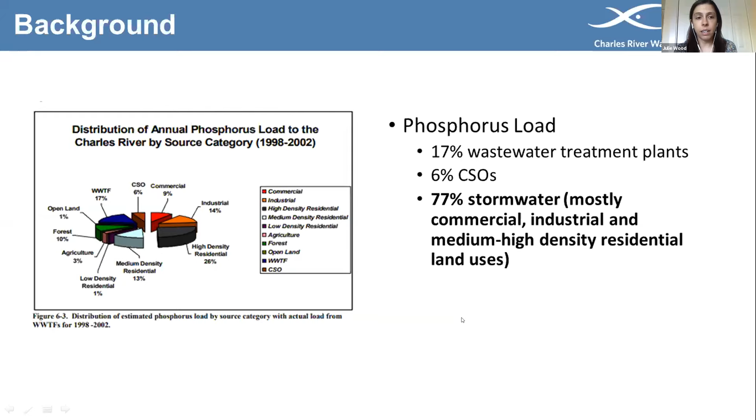TMDLs are essentially pollution budgets - they tell you how much pollution you have compared to how much you should have, and lay out a plan for how to get there. The Charles River nutrient TMDLs identified phosphorus as the nutrient of concern and stormwater as the primary source - the primary way phosphorus gets into the Charles River. The TMDL is now being implemented through the Massachusetts MS4 permit.

As many of you know, in 2016 a new permit was issued. It was postponed for a year but went into effect in 2018. In 2019, your year one reports were due and you got them in. Now in 2020, the year two reports will be due shortly. There is also an amended permit out for public comment, but again, that's not our focus for today.

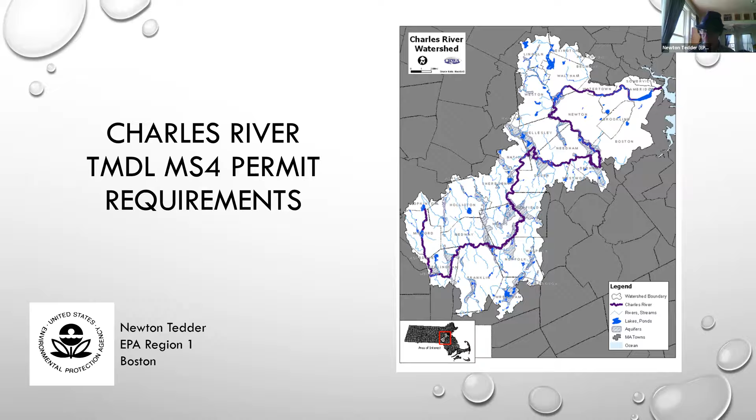I'm going to go through the TMDL requirements and the MS4 permit for Massachusetts. As Julie mentioned, all these requirements are contained in Appendix F of the 2016 Massachusetts MS4 permit, currently in effect, affecting all communities in the Charles River watershed. I'll go briefly through a TMDL overview - background on how those TMDLs got into the MS4 permit - then through phase one of the phosphorus control plan requirements in Appendix F, since that's our first phase, affecting the next 5+ years of implementation, and where everybody should be focused right now.

Then I'm going to go through phosphorus reduction credits - the things everybody can be doing and should be aware of that are available for communities to take advantage of, to meet the phosphorus reduction requirements contained in the MS4 permit.

Okay, so we've got two phosphorus TMDLs, as Julie mentioned. There's the Upper Middle Charles TMDL and the Lower Charles TMDL. The Lower Charles was completed in 2007, and the Upper Middle was completed in 2011.

It is a really urbanized watershed for the most part. We have 35 cities and towns. It's 308 square miles, and it covers about 900,000 people in population, a little bit more now, so that number is a little bit old. But this is a pretty urban watershed.

As Julie mentioned, the main source of phosphorus impacting the Charles River throughout the entire basin is stormwater. Over 70% of the problem is due to stormwater. Therefore, the TMDL is really focused on that particular source of phosphorus, where those sources were coming from, what land use areas were contributing the most, and what those reductions needed to be to meet our TMDL goals.

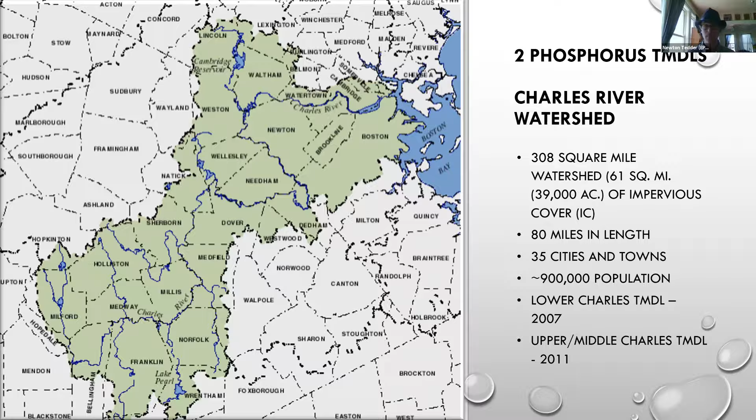The Lower Charles was the first of the TMDLs to go in 2007. Each TMDL needs to include what's known as a waste load allocation. Any permitted source, any National Pollutant Discharge Elimination System or NPDES permitted source, has to have a waste load allocation in any EPA approved TMDL. That waste load allocation is what that source needs to reduce their discharge of that particular pollutant down to in order to meet water quality goals.

So for instance, the Stony Brook watershed has an existing load of 5,123 kilograms of phosphorus per year discharged into Stony Brook. Their waste load allocation was 1,950 kilograms per year. So that means you have to get from their existing load down to their waste load allocation in order to meet their water quality targets.

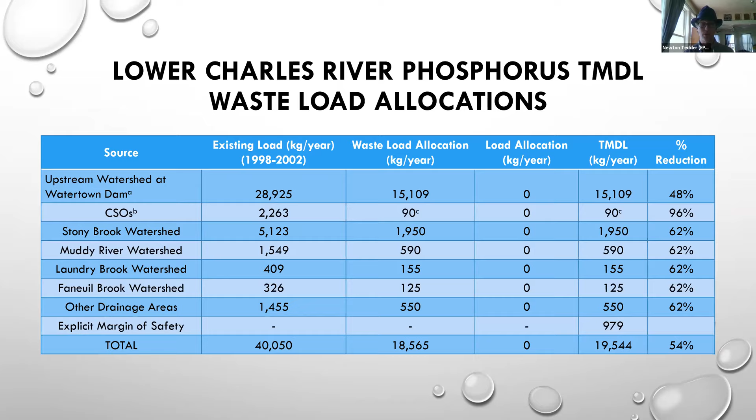And once we have a TMDL with a waste load allocation for particular NPDES permitted sources, any permit issued to those sources needs to contain that waste load allocation and measures that are consistent with the TMDL and that waste load allocation to ensure that those discharges meet water quality.

Both the Upper and Middle Charles TMDL and the Lower Charles TMDL went through the amount in kilograms per year of total phosphorus that needed to be removed from multiple different sources throughout the watersheds. They also provided a waste allocation in the form of a percent reduction from that particular source. Also, the TMDLs broke down even further the waste allocation into particular land use groups, assigning different reduction percentages to those land use groups in order to meet water quality goals.

The Lower Charles TMDL was a much tighter area. It is highly urbanized, containing mostly Boston, Cambridge, a bit of Somerville, some of Watertown, some of Newton, some of Waltham. So that TMDL is a very hyper-urban environment, and they just assigned the same waste load allocation to each land use. So if each land use contributing phosphorus to the Charles River was to reduce their phosphorus loadings 62% per year, the Lower Charles would meet the goal.

The Upper and Middle Charles broke it down a little further than the Lower Charles TMDL and assigned different reduction percentages to different land use groups. So you can see here that commercial, industrial, high density residential, medium density residential, and highways all got the same 65% reduction. As Julie mentioned, commercial, industrial, and high density residential are our main sources of phosphorus throughout the watershed, and it is therefore why they get the highest percentage of reduction required.

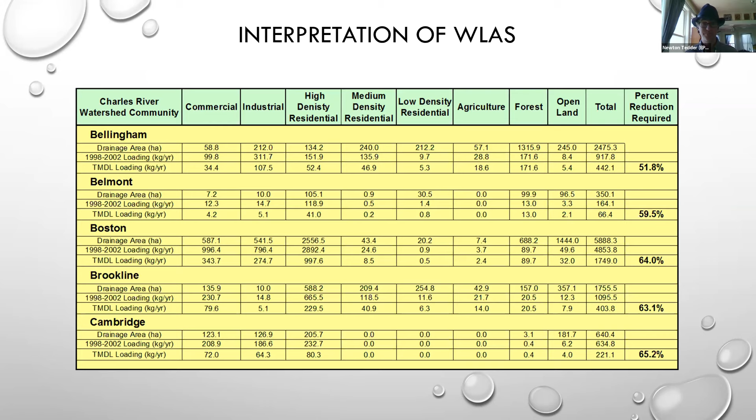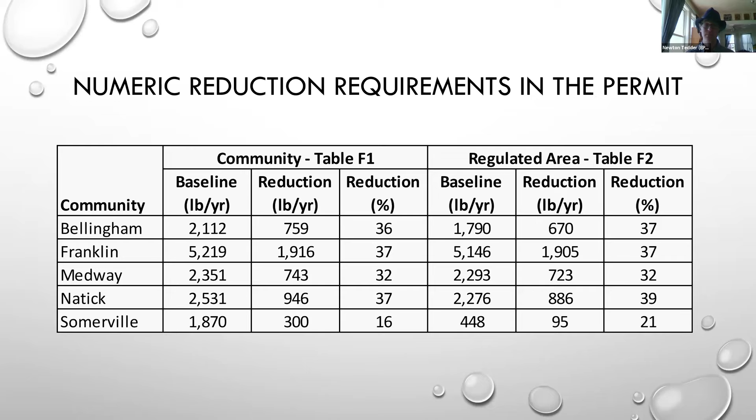The permit contains a long implementation schedule for full implementation of the Appendix F requirements for the Charles River TMDLs. The permit anticipates complete adherence to the waste allocation within a 20-year timeframe, but offers a significant ramp-up time and significant work at the end. This was done very deliberately to allow for a lot of planning upfront and breaking up the work into different phases, phase 1, 2, and 3, corresponding to 5-year increment periods for implementation. Our hope here was to have a really deliberate process by each community to take this seriously, give them enough time to put all of the correct mechanisms in place to allow them to do it successfully, and have a successful program over the next 20 years so we can eventually meet water quality throughout the Charles River watershed.

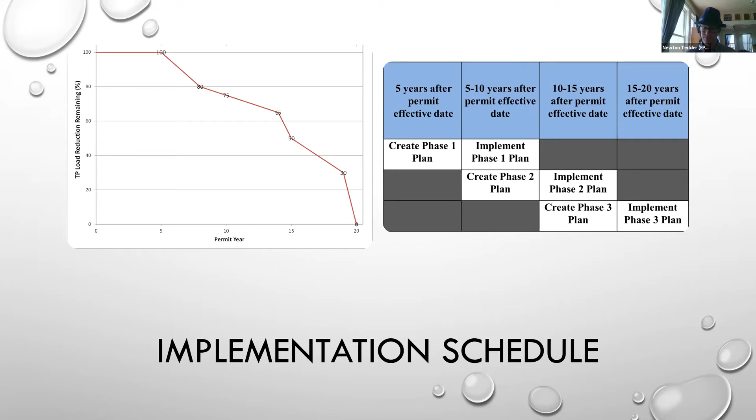Today, we're just going to be focused on the first 5 years of implementation. So this is phase 1. The phase 1 PCP, or phosphorus control plan, needs to be completed over the first 5 years of the permit term and then implemented over the next 5 years. So while the permit term only lasts 5 years for an MS4 permit, the schedule in this MS4 permit goes out beyond the term of the permit and remains enforceable until a new permit is in effect.

Phase 1 includes a lot of different components. This is much bigger than the phase 2 and 3 requirements, just because, again, we're talking about a very deliberate process, hopefully laid out in specific pieces over the course of 5 years to end up with a comprehensive phosphorus control plan after 5 years that can be implemented by each municipality over the next 5 years of implementation. I'll be going through each one of these pieces today, touching a little bit on what we are expecting out of each one of these pieces, and I'll go through them as far as when they are due.

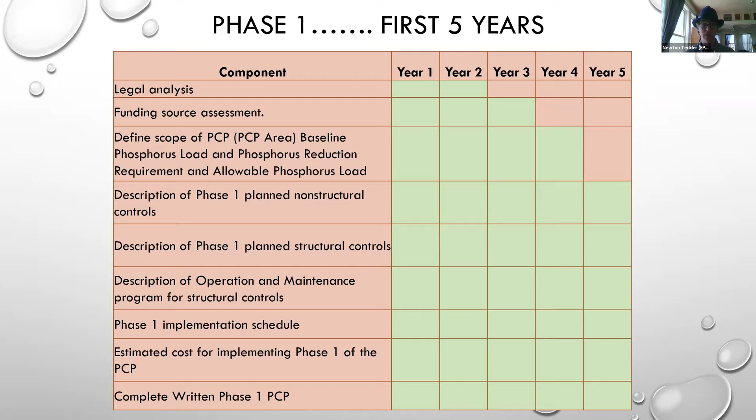The first one is their legal analysis, and hopefully everybody that is covered under this permit has already completed this. If not, you've got 1 month left to go. Annual reports are due for year 2, or they are due September 30th of this year, and they cover the reporting period that ends June 30th. So year 2 of the permit term ends June 30th, and the legal analysis for all Charles River communities for their phosphorus control plan needs to be done by year 2, and they'll be reporting on their legal analysis in this year's annual report.

What is a legal analysis? This is really a pretty open-ended piece, so this shouldn't have been a very big lift by year 2. It is really for the municipalities or permit holders to look inside and see if they have the correct ordinances in place. Do you need additional ordinances? Do you think you will need additional ordinances to implement your phosphorus control plan? Do you have easements that are necessary for operation and maintenance authority, for instance? Do you have the correct legal authority to help with anticipated funding mechanisms? Or are there any other legal authorities that you think you may need that will help you deal with the phosphorus loadings that are coming from private property owners that are entering your system? And if so, the analysis requires you to identify those and begin to implement those to get those authorities in place as soon as possible.

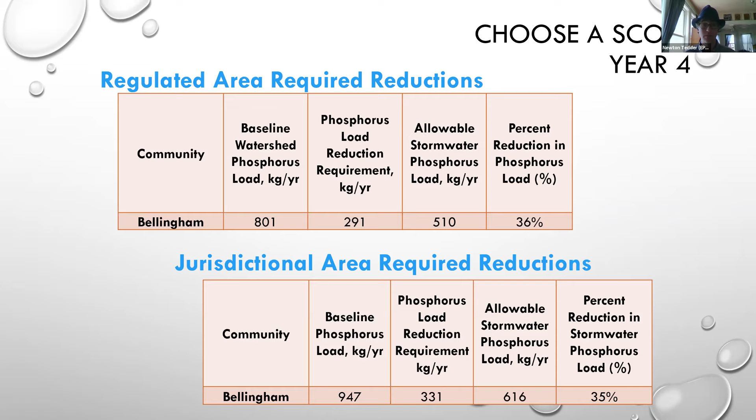So what does regulated area mean versus jurisdictional area? For instance, if we look at Bellingham, our regulated area map is shaded in red, and the unregulated area consists of those donut holes within the shaded area. Under MS4 regulations, only discharges originating from or through that regulated shaded area require an NPDES permit.

Discharges outside of what is known as urbanized area, according to the US Census, do not need a permit and are not subject to MS4 permit requirements. However, the MS4 permit in Appendix F allows the community to make a choice for themselves on where they want to implement their phosphorus control plan, and that choice comes with different loading rates and different requirements.

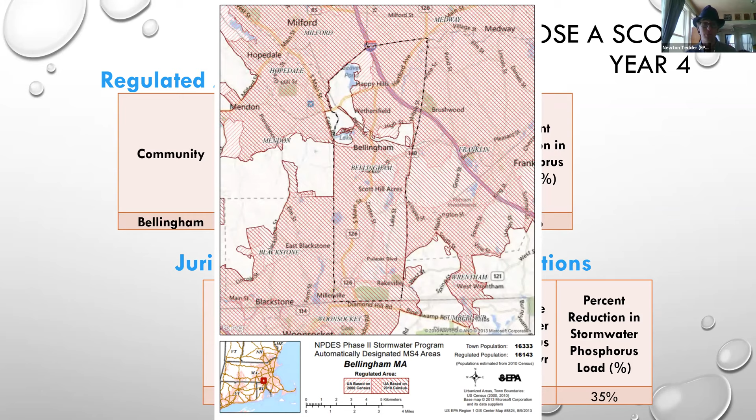If a community chooses to work just within their regulated area, controlling only the phosphorus coming from their regulated or urbanized area, that generally has a lower total phosphorus reduction requirement placed on the municipality or permit holder. However, only structural and non-structural controls done inside that regulated area can be counted towards that load reduction.

There needs to be additional accounting on the part of the permit holder to carve out where they're street sweeping, where they're catch basin cleaning, where the structural controls are being done, in order to only count those controls done in the regulated area towards their reduction targets.

The regulated area scope also allows permittees to submit updated land use information in year 5 of the permit term, as well as updated catchment information to refine the TP reduction targets in the next permit term. This means you can submit land use and catchment information that could carve out additional sources of total phosphorus to deal with in another way. Therefore, your total reduction requirement may go down if you submit refined catchment information.

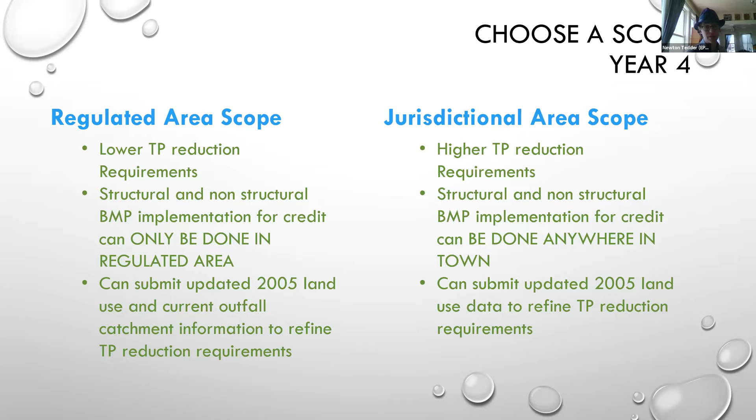Your final written PCP is due in year 5. And this includes all of the other pieces I showed you back in the phosphorus control plan schedule. So this is a description of all the structural and non-structural controls you're going to be using to meet the phosphorus reductions required in phase 1, based on the jurisdiction or regulated area choice that you've just made.

It includes operation and maintenance plans for structural BMPs that you are planning to implement for phase 1. It includes a structural implementation schedule. So where are you going to put all of your structural BMPs for phase 1 to meet your reduction targets? It also includes estimated costs. So you need to cost out all of the structural BMPs and non-structural BMPs you'll be using to meet your phosphorus reduction targets and provide an estimated cost in year 5.

And this is where you would be submitting any land use change or catchment delineations with your phosphorus control plan for use in future permit requirements by EPA.

Your phase 1 milestones that you're going to be looking at. So these are the 2 milestones within phase 1, and this is how you will begin to look at how much phosphorus you need to reduce in order to start to identify what non-structural and structural control practices you'll need to be implementing by year 10 in order to meet these permit milestones.

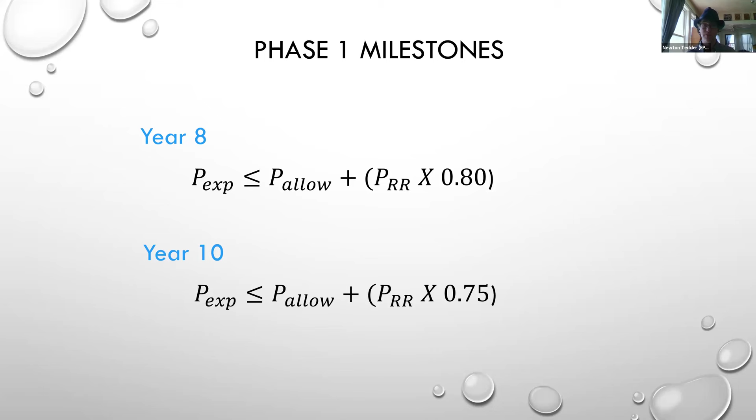Let's go through an example. So Bellingham has a baseline phosphorus load of 947 kilograms per year, a phosphorus load reduction requirement of 331 kilograms per year, allowable stormwater load of 616, which is a overall percentage load of 35%. That's based on all the land uses throughout Bellingham, using the phosphorus reduction requirements in the TMDLs.

So for year 8, the export must be below 880 kilograms per year. That is taking the allowable phosphorus load and adding in the reduction requirement times 0.8, so a 20% reduction. That's a reduction target of 67 kilograms per year that Bellingham needs to reduce by year 8 after the permit went into effect. Year 10 is a 83 kilogram reduction, which equates to about a 25% reduction in 25% target of the pollution reduction total. So 83 kilograms per year of total phosphorus reduction by year 10.

Those numbers are necessary for each community to begin looking at all of the things I mentioned before. So this is supposed to be a comprehensive plan that you look at and figure out, okay, I've got 67 kilograms per year by year 8, 83 by year 10. What are the stormwater controls that are going to be needed to meet that? What are the costs of those are going to be within a range? Do I have the funding mechanisms in place? All of this sort of fits together in one big comprehensive plan to meet these two milestones.

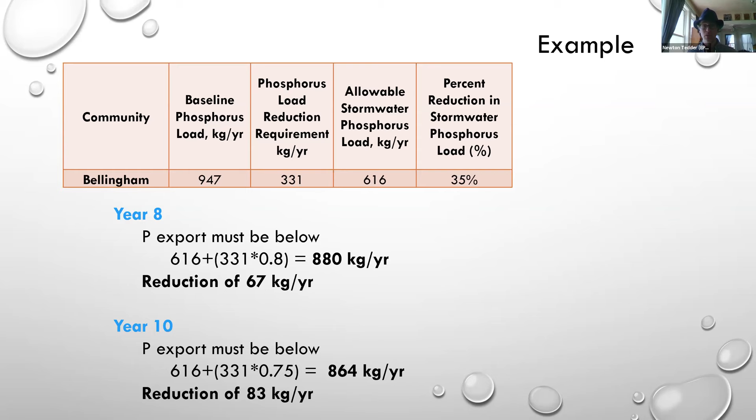Compliance with this is demonstrated not through monitoring of BMPs or monitoring structural controls or non-structural controls, but with specific reductions and increases that are laid out within the permit itself and Appendix F appendices. So this becomes a math exercise, an accounting exercise where you are certifying that you're doing certain BMPs.

Those BMPs are automatically given credit within the permit scheme. So when you're doing them, you are documenting that you're doing them and plugging them into different tools we have, or this large math equation saying these are the practices I'm doing, these are the land use changes I've had over the last year that would increase my total phosphorus load. For instance, new development that would increase your total phosphorus load.

And you're coming up with what your export is in mass per year, every year of the permit term and every year going forward after year 5. So this is a lot of accounting. There are pieces here that you need to keep track of.

However, we're trying to make this as easy as possible in that you're not actually having to go out and prove that every BMP is working the way that you say it is. We have a very consistent way of demonstrating compliance with the TMDL watershed wide. So this is not a community by community thing. Every community in the watershed needs to be using the reductions and increases laid out in Appendix F.

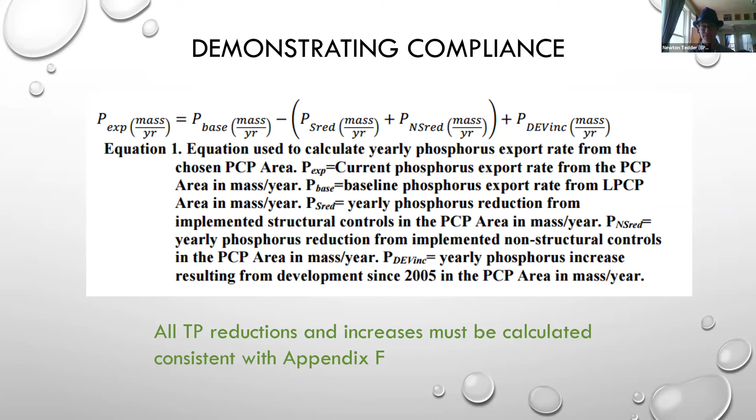So there's a lot of things in Appendix F that are actually available for credit. Structural BMPs available for credit are laid out here in this crosswalk. This crosswalk was developed by UNH Stormwater Center, but it's available on our website. It takes the Massachusetts Stormwater Manual and crosswalks that with the EPA pollutant curves.

It tells you what EPA pollutant curve you would be using to estimate the phosphorus reduction from all the different practices contained in the Massachusetts Stormwater Manual that developers or municipalities are used to using. This is basically just a difference in nomenclature. If you were to pick any stormwater manual from across New England, they would probably name things slightly differently.

So this crosswalk does a really good job of saying, when you have a water quality swale that you've designed in accordance with the Massachusetts Stormwater Manual, you're going to use the EPA grass swale curve to figure out what pollution reduction you get from installing that water quality swale.

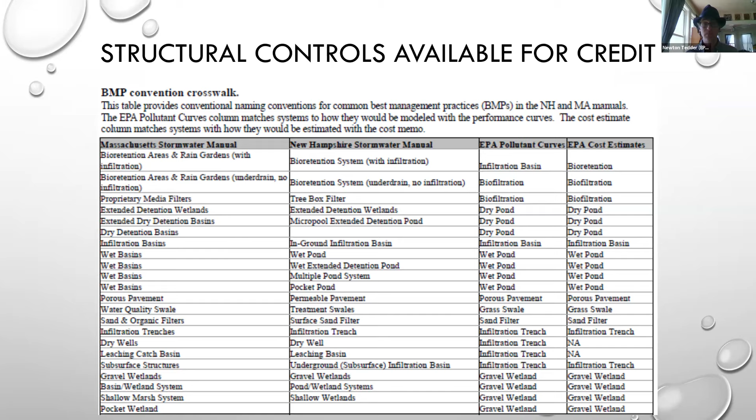So what does that mean? Your structural BMPs are going to be installed in order to meet your total phosphorus reduction requirements throughout the municipality over the next 20 years. Each one of those does work, removing phosphorus from stormwater before discharge.

And all of those stormwater controls act differently based on their sizing. So EPA in Appendix F has created multiple different, what are known as pollution reduction curves, for different pollutants and volume for different types of BMPs that were in the last slide. They're all based on the physical storage capacity of that BMP.

And what that means is it's the total design storage volume. You can think of it like volume, length times width times height. And storage volume is that plus you need to take into account porosity of the material that is storing the water for that structural control.

You take that designed volume of water that the BMP can hold at a snapshot in time, and you divide that by the impervious area draining to that BMP, to come up with your inches of runoff treated, or depth of runoff treated from impervious area.

And using that, you can then use these curves to say, okay, if I'm treating 0.2 inches of runoff from impervious area in my BMP, I can go to the curve, go to 0.2, and go up to my total phosphorus curve and say, I'm removing about a little over 50% of phosphorus based on the soil type, based on the type of BMP I'm installing or stormwater control I'm installing, and its designed storage volume and the impervious area draining to it.

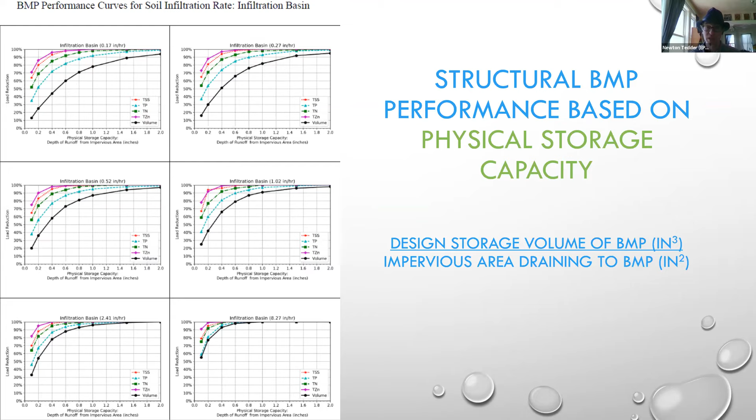What does this look like? This looks like different types of rain gardens based on their sizing, based on soil types, and based on the type of material within them. You can easily look on the curves themselves to see what your reduction would be.

For instance, this rain garden was sized at 0.2 inches. It's in a soil that has an infiltration rate of 0.52 inches per hour. It's treating 0.2 inches of runoff from impervious cover that's draining directly to this rain garden, and it's getting about a 48% reduction in total phosphorus per year.

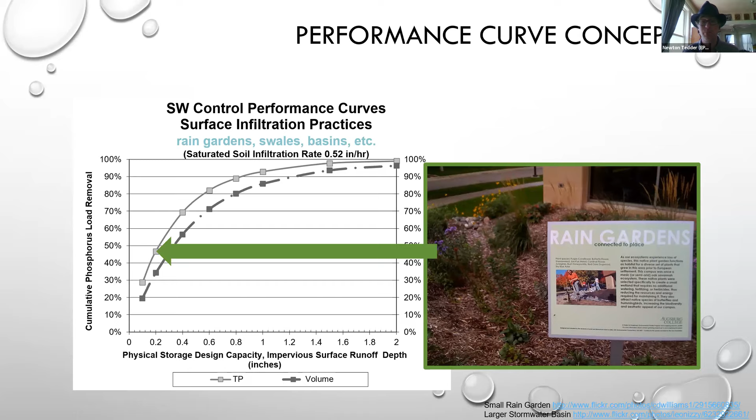If you sized it larger, you would go up to a 0.6 inch depth of runoff from your impervious area, and you're going to go up over an 80% reduction in phosphorus per year. You'll notice that this is not linear, and that is important. As you get up in size, you start to lose efficiency for that stormwater control.

This is due to the rainfall patterns in New England. We get a lot of small storms, and all of the phosphorus built up on our impervious surfaces gets washed off readily in those small storms. So capturing even the smallest storms, and not designing to a 1-inch system, can have really great effects for water quality and for treating stormwater.

The idea behind these curves was to provide as much flexibility as possible in designing your phosphorus control plans for the first 5 years and throughout the next 20 years. So not having to design to a 1-inch water quality volume, or treating 1 inch of depth for your impervious cover draining to your BMP, allows practitioners a much wider range of options for installing different types of BMPs in different areas, installing retrofits in the built environment and getting credit for those, going all the way down to 0.1 inches of runoff depth from impervious cover treated.

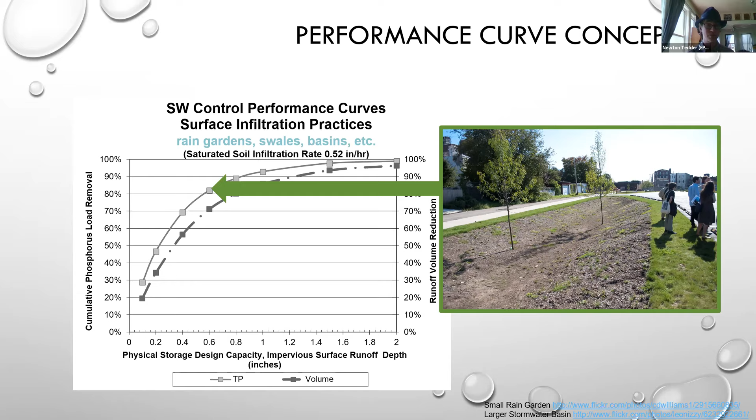And that can be a very, very tiny control. But we need to make sure that we're giving credit for even those small controls and allowing practitioners to put in stuff where they can.

The permit also gives credit for non-structural controls - phosphorus fertilizers, street sweeping, and catch basin cleaning. You'll notice that there is no longer a phosphorus-free fertilizer credit in the final 2016 permit, and that's because we built in the credit for each municipality based on the legislation passed by Massachusetts.

We may be revisiting that in the next permit reissuance, as that bill got pretty watered down and is not having much of an effect. So we may end up having to redo that phosphorus fertilizer credit in future permit terms, but that's to be determined.

Street sweeping has a 2 to 10% credit based on the sweeper type and based on the frequency of sweeping. So a mechanical sweeper done once a year is not going to get as much credit as a vacuum sweeper done every week. There is a variable credit scheme in Appendix F that changes the credit based on how much and what type of sweeper you're using.

You need to calculate the drainage area that you're sweeping and apply a loading rate to those areas based on land use, then apply a credit inside the permit from 2 to 10% based on type and frequency. For catch basin cleaning, you have to follow the permit requirements, which are to maintain 50% capacity in all sumps. However, there is a need to calculate the drainage area to each catch basin in order to claim that 2% credit.

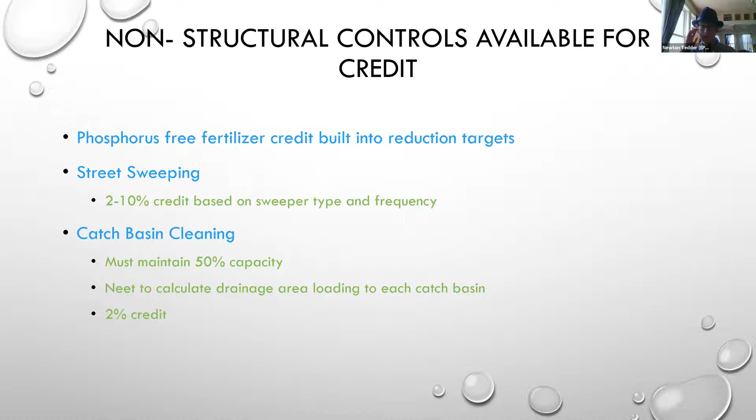So this is all math. All of it is an accounting exercise. The credits are laid out in Appendix F, but the appendices and its attachments are hundreds of pages long. That's there for a reason, because we need to lay out all the information that goes into calculating these things, and people can do that on their own if they want.

We've also been trying to come up with different tools to help permit holders identify and calculate what their pollution reductions are and what our estimated costs of those pollution reductions will be. The Opti tool is one such tool that we've created. It has all the BMP performance curves for all structural controls that we have credits for, built right into the Opti tool, as well as some non-structural control credits.

The idea is that you would type in what your management objective is. That would be like what your phosphorus reduction target is going to be based on your choice of jurisdiction. Then you would put in an optimization target, selecting what you want to optimize here. Do you want to only put in certain capacity controls? Do you want to only put in certain types of controls?

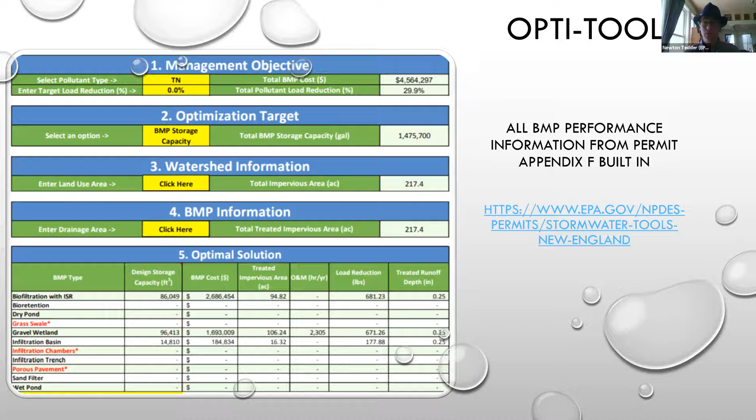What this really focuses in on, when you run Opti tool, is sizing implications. It'll come up with thousands and thousands of different ways you can meet your reduction target, and their cost ranges will be huge, because if you choose to only install things throughout town that are 1 inch in size, or treating 1 inch of runoff from impervious area,

your costs for installing those size BMPs go way up. But if you were to allow for variable sizing, installing things down to 0.1 inches, 0.35 inches, in different land use types with different soil types, your efficiency will go down per BMP. You may need to install more BMPs, but your costs overall will also go down, and you'll still be meeting your same target. So this is all choices that municipalities can make in implementing their phosphorus control plan: what type of BMPs they want, how big they want them to be, how many they want, etc., to come up with an estimated cost for implementation.

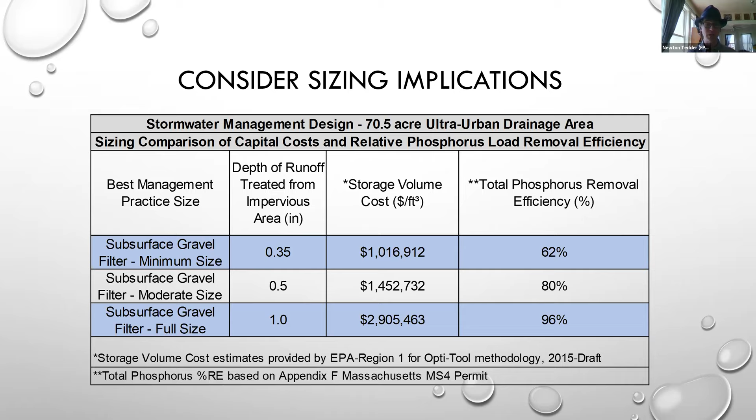A slightly easier version is just called the BATT - the BMP Accounting and Tracking Tool, also available on our website. This is a spreadsheet-based tool that has all the pollutant curves for the structural controls from the permit built in.

It also includes all of the pollution reduction credits available from non-structural controls at this time. The municipality just needs to enter the required information about the BMP or the non-structural control, and it creates an Excel database for that municipality, exporting overall reductions and increases. You can also put land use change increases in here, and it spits out a form you can submit to EPA every year showing how much you have increased or decreased your phosphorus load based on the structural and non-structural controls implemented to date.

Again, both of these tools are available on our website, and feel free to try and use them. We are always open to feedback. We just had some feedback from Cambridge that was using our BATT tool, and hopefully that came in handy. It actually came in handy for us too, because we made some changes based on that.

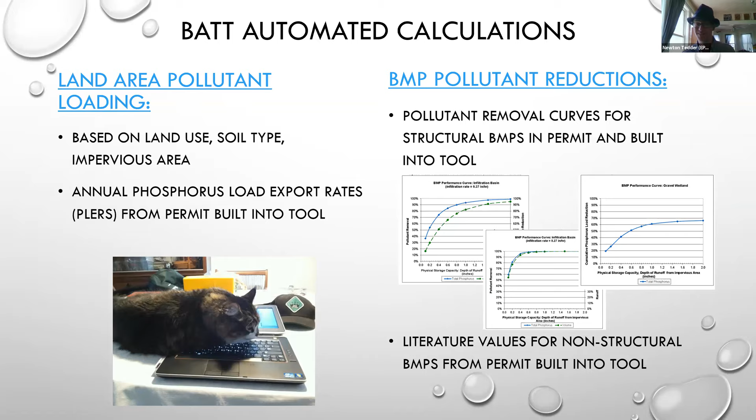All right, thank you, Newt. Thank you so much, that was great. Newt covered a lot.

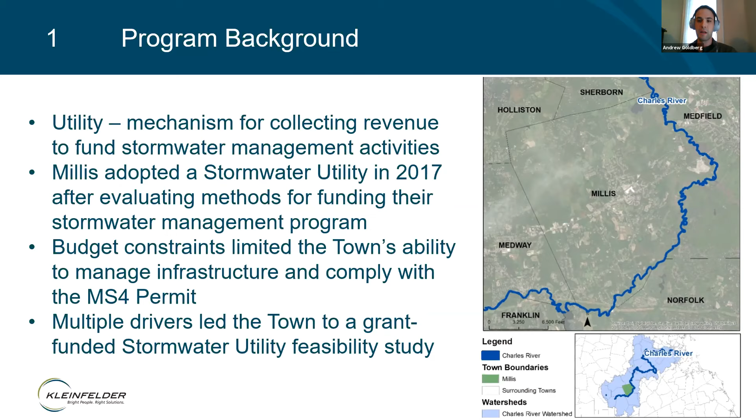That first process that Jim alluded to, evaluating a few different options for funding the town's program, was paid for under a state grant. We intentionally phased that first part of the process to have a number of different off-ramps, so the town would have options on whether to continue funding their program through their general fund or a combination of different revenue sources. But ultimately, given the town's goals and long-term financial outlook, the town chose to implement a stormwater utility.

During that first phase, which was grant funded and took about a year, the town accomplished a lot. They looked at their revenue needs, and thought very carefully with a number of different stakeholders about what types of costs should be included in this enterprise fund, very similar to a drinking water or sewer utility. They thought about how rates would be set, who would pay, and how much each ratepayer would pay. They were able to see that the utility would be a really good sustainable mechanism for funding about $600,000 worth of investments annually into their system.

A really large portion of those expenditures are for their existing team in DPW and across multiple different departments. During that first phase, the town realized how many different people and departments were involved in meeting regulatory compliance requirements, reporting, sending bills, and keeping their infrastructure maintained properly. That was a really enlightening process, getting people talking about the different components of stormwater to see how their role fits into a larger picture. I'm sure many of you listening would nod your head thinking that it does take a large team to do all the things we need to do with our drainage infrastructure.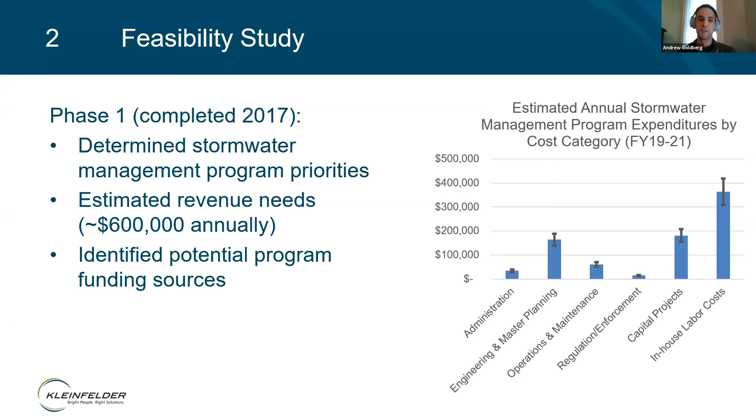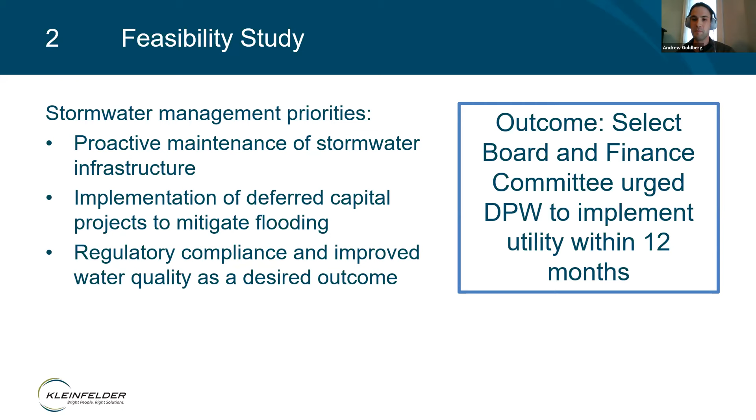As a result of this stormwater management program, they wanted to make sure regulatory compliance was an outcome. So after this first phase, the select board and the Finance Committee really urged Jim and his colleagues to implement a utility. So we fast-tracked this process of implementation and really focused on education and outreach to the public.

Anytime you implement a new fee, there's going to be a mixture of reactions from the people paying it. So we really focused on a comprehensive educational and outreach program to reach members of the community who would be receiving this bill, to make sure they understood why, and the benefits they would be receiving as a result of this new fee.

And that's what this slide is showing on the right-hand side: what state GIS publicly available files provided us in terms of aerial imagery, the footprint of buildings, and remote sensed data for where impervious area is.

We then cleaned it up so that it would be suitable for billing, not down to the square foot, but suitable enough so that the town could accurately send a bill reflecting its policies, really focusing on consistency so that ratepayers were not complaining about how their bill was different than their neighbors when they have the same amount of impervious area. That was a very big part of the refinement process.

But there are several different routes for setting rates so that the upfront cost of setting up your billing file is faster. We're now in what I call phase 3, which is the ongoing maintenance and evaluation.

Jim had alluded to potentially changing policies to be more lenient around credits, so that folks who are trying to contribute to the stormwater management solutions of improving water quality and mitigating flooding are getting the credits the town says they deserve. So we're doing a little evaluation to see how policies can be changed over time to recognize that good behavior and stewardship.

We're doing continued public education in line with the MS4 permit and some upcoming projects around flood mitigation, and really working with the town to provide training on new platforms they're implementing with their asset management program, so that they can sustain the process of sending bills on an annual basis.

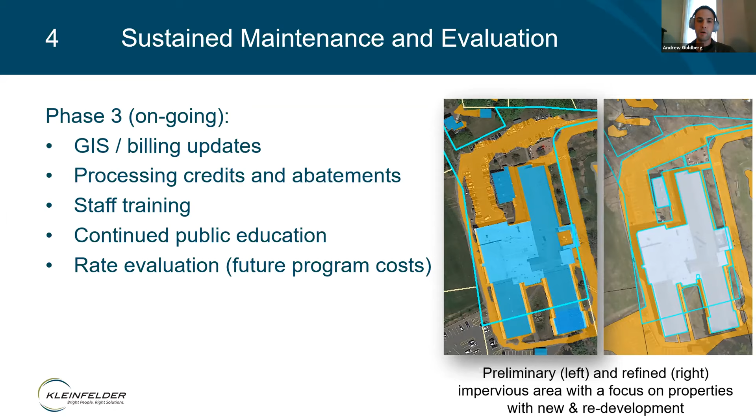I think through this third year of implementation, we've really learned a lot. The town has received about 1% of the people receiving bills either asking questions about it or appealing. Some of those are requiring a change on the billing file, and that's definitely to be expected in the first couple of years of implementation.

But as we're getting to the third year, we're really seeing that volume of questions or appeals tapering off, and folks now understand the town's routine of sending a bill in the fall for this service they're providing. And I think with that increased capacity in town to provide stormwater services...

Jim's department is able to look at some other aspects of its program and has been able to fund asset management and flood mitigation work through the stormwater utility.

We're about to enter our second year working with the town of Millis on their asset management program, which is partially grant funded. We're also looking at other potential funding mechanisms to prepare for climate change and the effects that climate change will have on flooding, so looking at additional grants to supplement the town's dedicated fund through the utility.

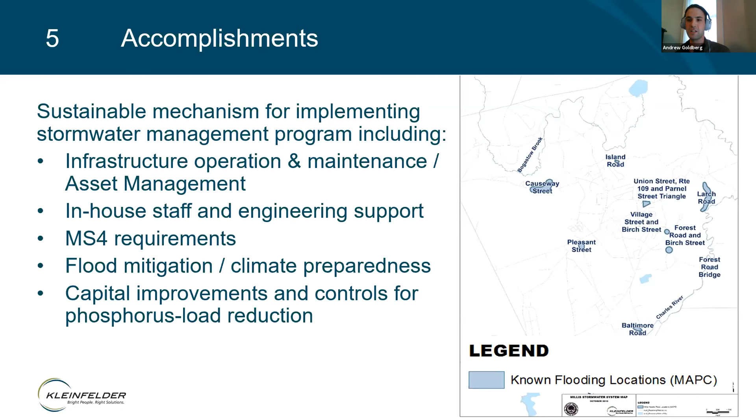So I'm really proud to have partnered with Jim on this implementation, and my colleagues at Kleinfelder and a couple other firms who supported this work. And we're looking forward to continuing to support the town of Millis with this work.

Great, thank you Andrew and thank you Jim. Really great on-the-ground, real-life story there of how that played out in Millis. Lots of good takeaways from that, and great that Millis is thinking about climate adaptation and MS4 compliance together. Certainly an approach we support at CRWA.

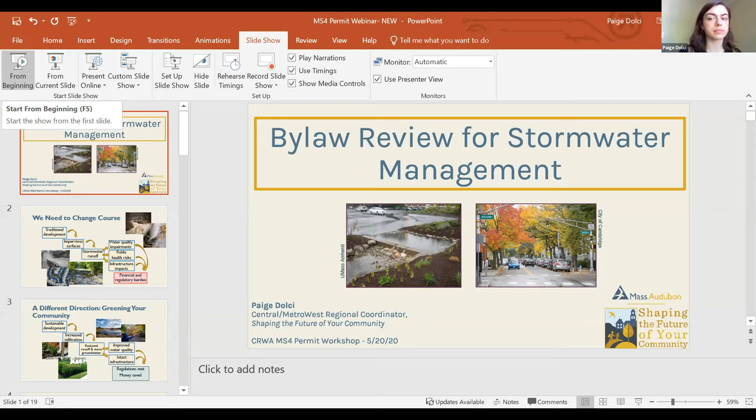Okay, thank you. So Julie gave a great introduction before, but my name is Paige Dolci, and I work for Mass Audubon's Shaping the Future of Your Community program.

So I'm going to be giving just a brief overview first of sustainable development and low impact development. Then I'm going to go over our bylaw review tool and how you could use it in your communities. And then I'm going to give two examples of communities who've used the bylaw review tool and since gone on to update some bylaws and regulations.

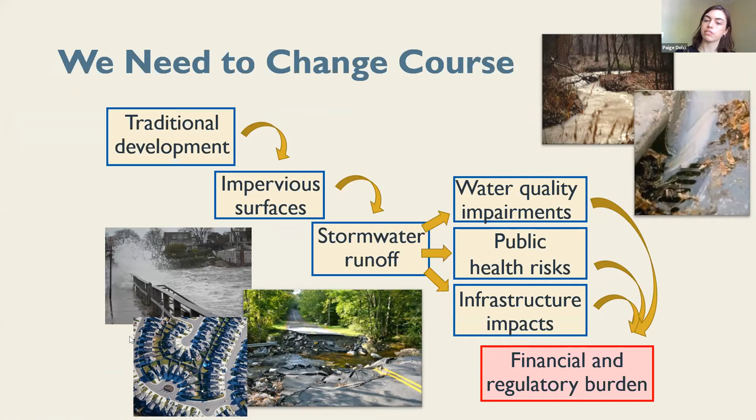So very big picture overview: traditional development means more impervious surfaces, more stormwater runoff, resulting in water quality impairments, public health risks, and infrastructure impacts. And this ultimately leads to financial and regulatory burden.

Alternatively, with sustainable development, you're using nature to increase infiltration and reduce runoff, and at the same time you're increasing groundwater supplies, which is especially important given climate change and increasing drought. Perhaps most importantly, you're improving water quality and intact infrastructure, meeting regulations and saving money at the same time.

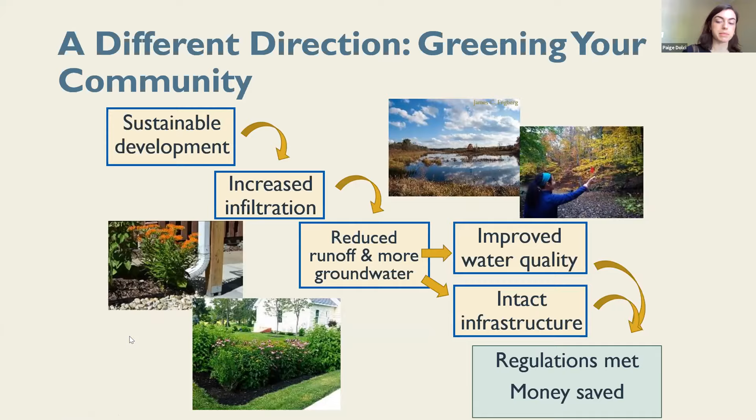So as I mentioned, we have this dual threat of sprawling development and climate change that can make the impacts worse. So what do we do about it? We can protect what we have, and we can develop smarter.

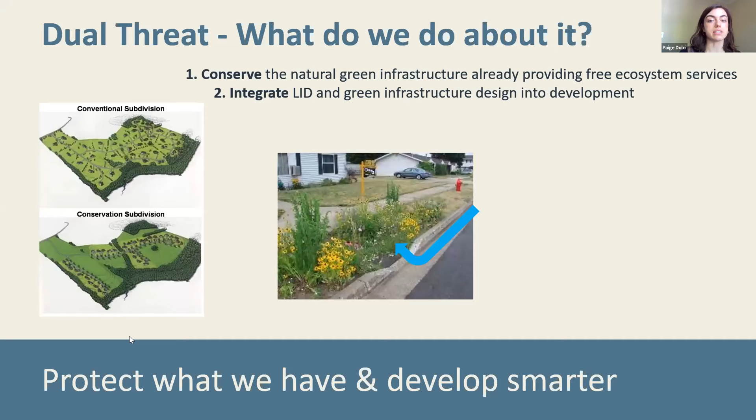Mass Audubon usually takes a three-part approach: conserve, integrate, and restore. For conserve, this image on the left shows a conventional subdivision versus a conservation subdivision, which uses flexible lot sizes to allow for shared open space protection within the subdivision.

Then integrate low impact development and green infrastructure design into development. Right here, curb cuts allow stormwater to flow into the bioswale and infiltrate rather than running off. This can also be seen with narrow curbless roads, vegetation between roads and sidewalks, tree box filters between roads and sidewalks, and minimizing site disturbance.

And then lastly, restoring local resiliency through low impact development and redevelopment. The picture on the right is actually Broadmeadow Brook Wildlife Sanctuary, where I work. Several years ago it was redeveloped, and they incorporated a rain garden, which treats stormwater runoff from our parking lot before it reaches the brook, improving water quality.

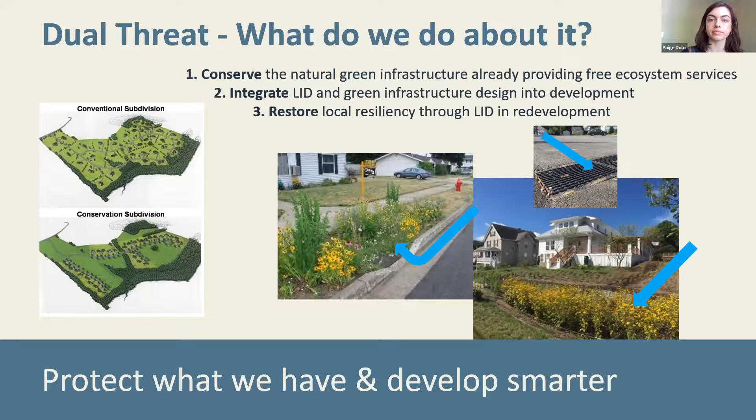So low impact development, really quickly: development design standards that utilize plants and soils in capturing and filtering water while minimizing imperviousness. It's treating water as a resource rather than a waste product, and you're managing stormwater as close to the source as possible rather than moving it elsewhere. And you're preserving natural landscape by recreating natural features.

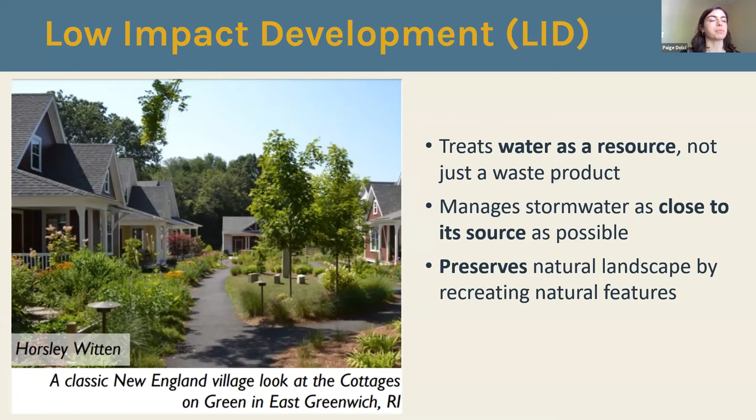So you're getting a lot of co-benefits of nature, including improved air quality and mitigation of the urban heat island effect. These can include rain gardens, bioswales—techniques like these mentioned in the best management practice list that Newton showed in his presentation. A great thing about low impact development is its diversity in its uses. It can really be done at any scale, from the most rural communities to the most urban.

Okay, so towns often come across barriers when trying to encourage more widespread adoption of these low impact development techniques, because their local zoning and subdivision regulations reflect conventional development practices and discourage or oftentimes prohibit low impact development techniques. So what can we do about this?

We can look at our bylaws in our communities. Making sure that your bylaws and land use regulations are consistent with your overall community goals is key to encouraging development where you want it and discouraging it where you don't, in addition to encouraging the kind of development you want to see, like low impact development or conservation design.

So the bylaw review tool we've developed assesses whether your community's bylaws, regulations, and plans reflect conventional, better, or best practices, which you'll see in the next slide. Changing these bylaws can help support the use of low impact development techniques as the preferred, most easily permitted methods for managing your stormwater.

And then a major advantage of this process is that it can help you identify low-hanging fruit—positive changes that can be made administratively rather than having to go through town meeting or city council.

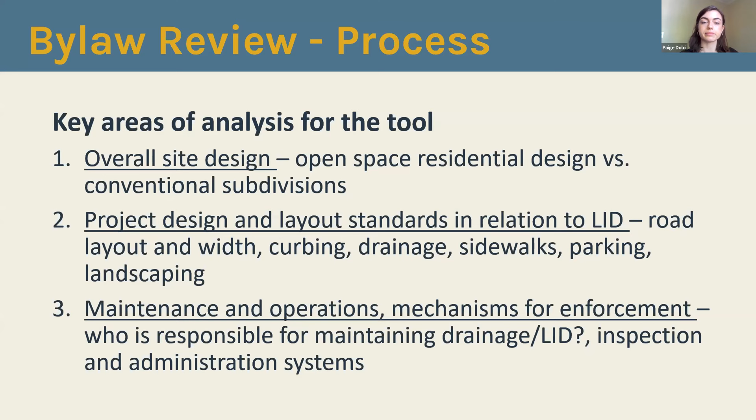So if you actually go into our tool, you would see two different tabs. One's for an open space residential design analysis, and another is for an analysis of zoning bylaws, subdivision rules and regs, site plan review, and stormwater and low impact development overview.

And this is where our 5 goals come in. So you saw in the snapshot goal 1 and goal 2: protect natural resources and open space, and promote efficient compact development patterns and infill. Goal number 3 is smart designs that reduce overall imperviousness, and 4 is adopt green infrastructure stormwater management provisions. Lastly, 5, encourage efficient parking.

So though all of these goals work to minimize impervious surfaces, which reduces stormwater runoff, goal 4 in particular addresses green infrastructure for stormwater management specifically. The section looks to explicitly discuss low impact development as a preferred method, such as requiring roof runoff to be directed into vegetated areas, and a preference for infiltration wherever soils allow or can be amended.

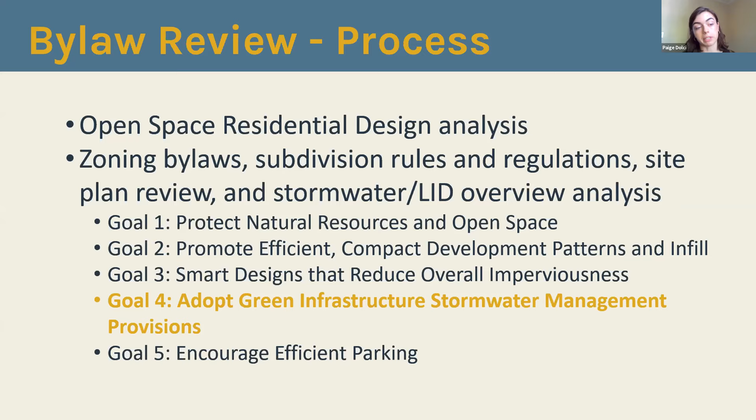Some other things addressed here, in addition to rooftop runoff, would be site plan requirements, the siting of low impact development features like bioretention and swales, permeable pavement, a stormwater management operations and maintenance plan, and requiring a construction, erosion, and sedimentation plan. Those are just things we look out for.

So now I'm just going to go into 2 examples of communities that Mass Audubon has worked with. We received a grant from the Metro West Foundation to complete bylaw reviews for Natick, Framingham, Dover, Sherborn, and Wellesley. This was Natick, and these 2 examples, Natick and Framingham, are ones where we did the bylaw review and then ended up assisting more down the line when they were actually making changes to their bylaws and regulations based on the review.

As of October 2019, Natick had 6 impaired water bodies, and stormwater was a major pollution source. 90% of Natick's private properties were not subject to stormwater regulations. So again, in 2016, we did the bylaw review and created our report of recommendations. Then in October 2019, Natick passed a new stormwater management and erosion control bylaw at the town meeting, with Mass Audubon and various experts in the field helping them update it.

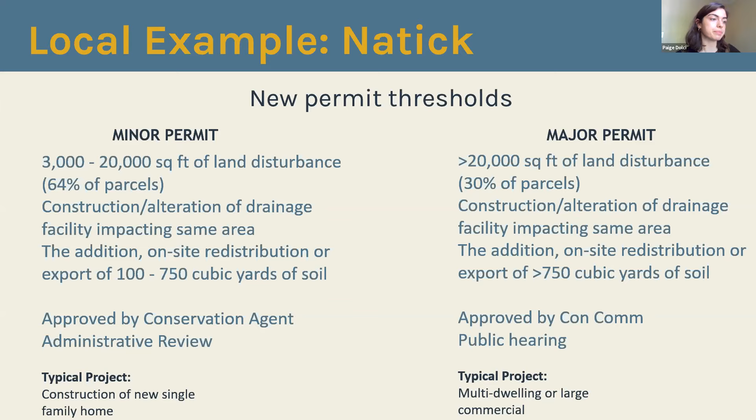So this is just one thing that the new bylaw did: it changed the minor permit and major permit for parcels regulated. Previously, Natick regulated parcels greater than 40,000 square feet and did not regulate parcels less than that. Now with the minor permit, it's required for 3,000 to 20,000 square feet of land disturbance, covering 64% of parcels. With the major permit, it's greater than 20,000 square feet of land disturbance, for 30% of parcels.

Another thing this bylaw did was help allow for more flexibility for low impact development. It allowed an opportunity for applicants to use low impact development techniques and nature-based solutions to comply with the Conservation Commission's regulation of the bylaw.

And then another example is Framingham. We did their bylaw review around 2016, and this community has done a lot. Just among other things, they've updated their subdivision rules and regulations, addressing best management practices, low impact development, and stormwater management. They've also updated their open space zoning provisions, which we assisted them with a bit.

This included site plan review - again, best management practice, low impact development, environmental impact reports, new off-street parking regulations incorporating methods to reduce parking space requirements, encouraging pocket parks, pervious pavement, more trees, etc. And lastly, the land disturbance and stormwater management section, which Mass Audubon provided some input on.

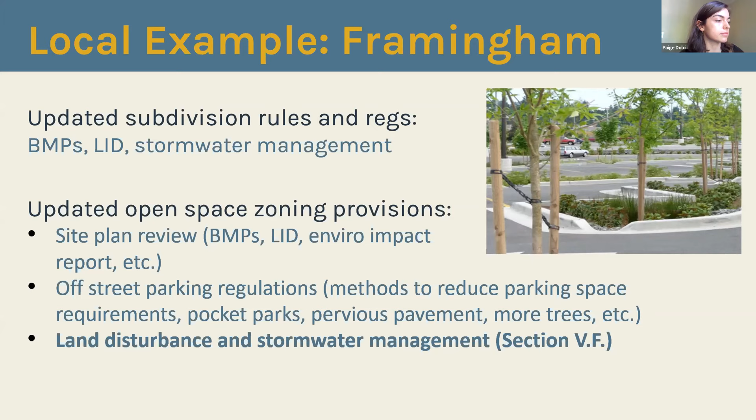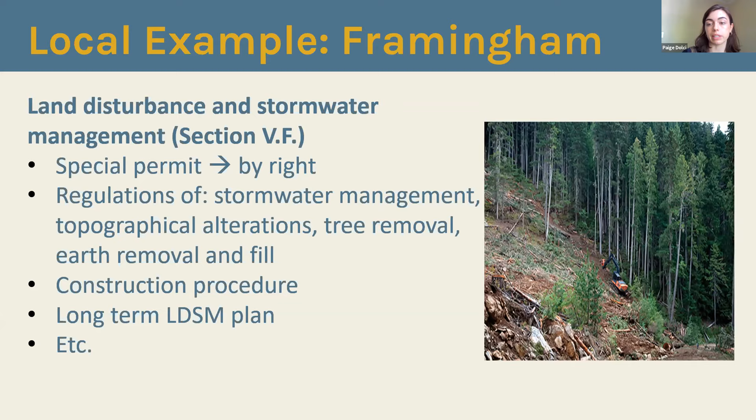This did a lot, and I would encourage communities to look into this. It changed the special permitting to by-right permitting, and included regulations of stormwater management, topographical alterations, tree removal, earth removal and fill, new construction procedure, and a long-term land disturbance and stormwater management plan, among other things.

So those were just examples of communities who have used the bylaw review tool and gone on to update bylaws and regulations, and potential communities to look to for examples and guidance. You could look at these bylaws that Mass Audubon has reviewed and commented on, and potentially use them as guidance in your own communities.

So for the bylaw review tool and a set of 5 low impact development fact sheets that we've developed, that focus heavily on stormwater management, that's available at massaudubon.org/LIDcost.

We also have a bit more on the bylaw review tool. There will be a similar webinar by the SNEP network, Saving Land, Water, and Money with Smart Local Land Use Regulations, with Mass Audubon and Devens Enterprise Commission. It's Wednesday, June 3rd, and there is a link to register for it.

This is geared towards municipal officials or staff, or really anyone interested in land use and water quality. You can get more of an overview on low impact development and how it's incorporated into new and redevelopment throughout communities to save land, water, and money.

You can also learn more about how to use Mass Audubon's bylaw review tool to assess and update bylaws and regulations. On our bylaw review page, there is also an already posted webinar that walks through how to use the tool, but we are creating a new curriculum for the bylaw review tool that's coming soon.